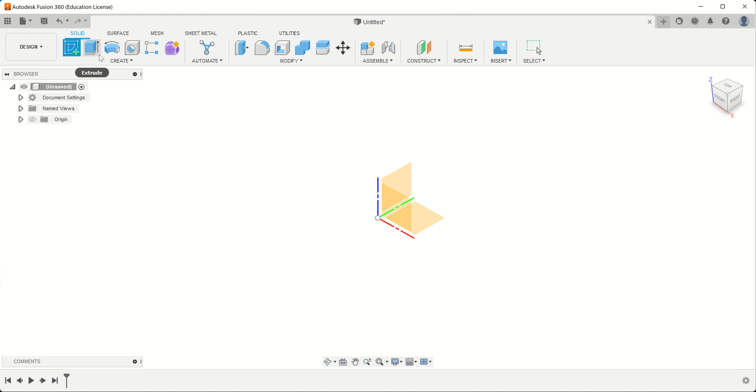Okay, so now we know about the center point, the axis of the work planes. The way that CAD works is that we need to create a sketch and turn that into a feature, in this case extrude. So I'm just going to show you roughly how it works, and you can have a little play yourself. So again, we need to create a new sketch, which you've seen before, and then the system is asking us to pick one of these work planes.

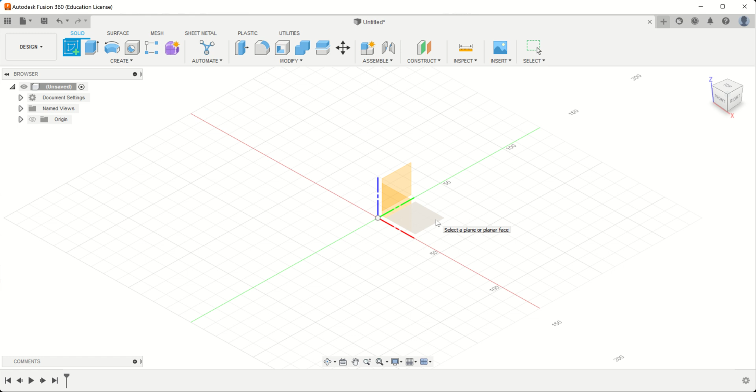So as we move around, we can go and select one of the three work planes. So we can create a sketch on a work plane or a face, as you can see there in the tooltip. So typically we always sort of look from the top down and create a new sketch on the XY plane, which is this one here. Once you click, your screen goes into a 2D mode.

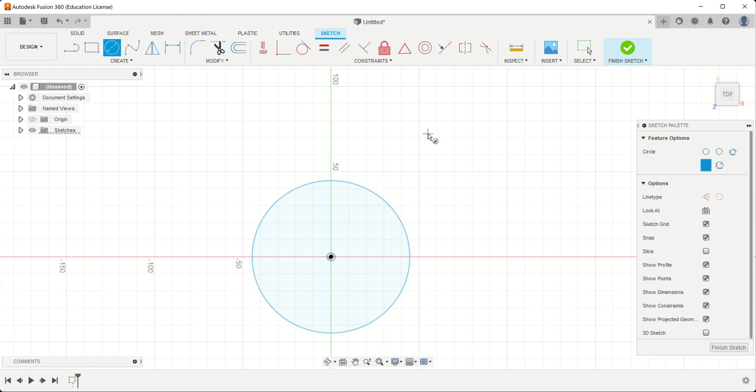We get the sketch palette up, okay, and then we can draw some basic shapes, and we'll go into this in more detail shortly. First of all, I'm just going to create a shape, so I'm going to draw it from the center point. I'm going to draw a circle. For this point, I'm not really worried about how big it is. So I've got what we call a closed profile, so a circle, so each end of the circle is attached, and you can tell it's a closed profile because Fusion has shaded it in.

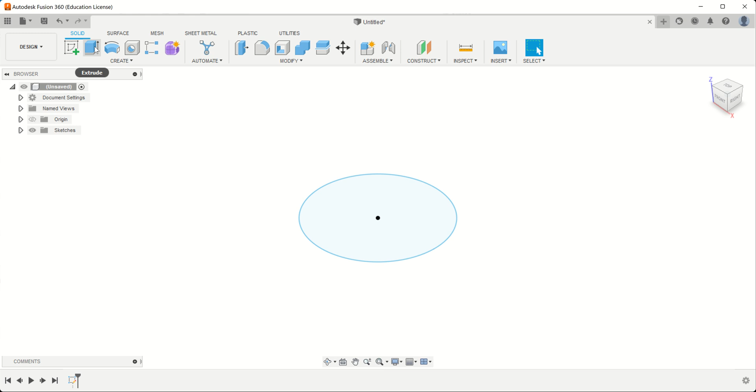So I'm now going to click Finish Sketch, which is on the right hand end, and it goes back to 3D mode. So now here we've created a sketch. You can see this in the timeline down the bottom. There's our sketch. So we're now going to turn this sketch into a feature, and the most common one that we use is the extrude. So we can click extrude. If Fusion sees a single closed profile, like it can here, it's already selected it. If it could see two or more, you have to select which profiles you want to extrude.

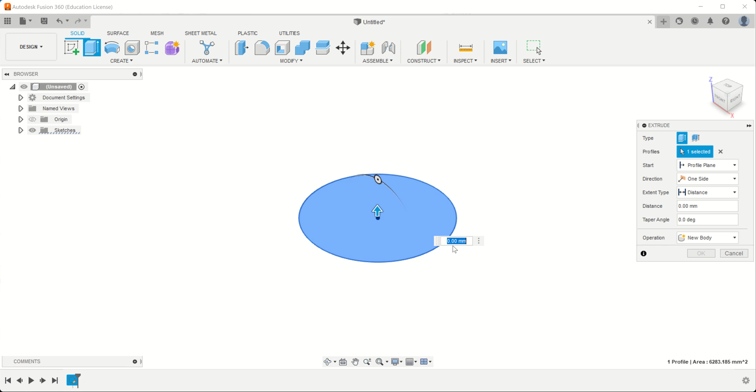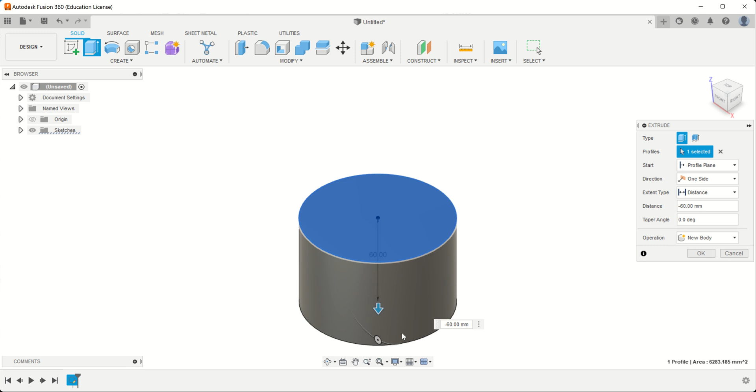Okay, so by default it's going to extrude it 0 millimeters. Okay, so we can drag it, we can type in this box here, we can type in this box here, it doesn't matter, they all do the same thing. Okay, so we've got some choices now. We can either go one side, in this case it's going up, but we can also take that down if we wanted to. Okay, and it just says a minus number. It just means it's going below the work plane, so we can go up or down.

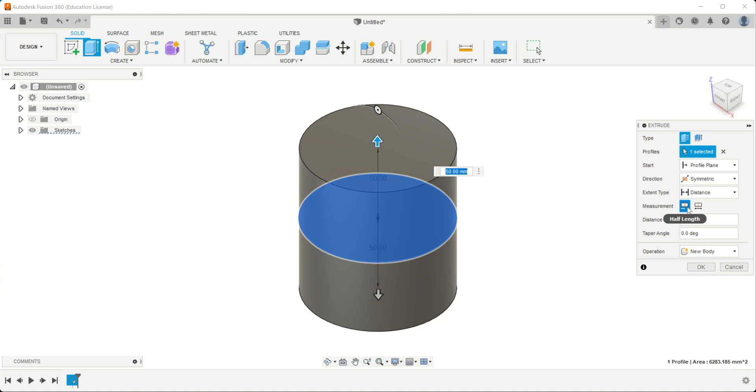The other choice we've got is two sides, so we can go 10 mil down and 50 mil up if we wanted to. And then the other choice we have is symmetrical, so in this instance it's doing 50 mil both sides of the work plane. That's what this one is here, and then this one it's doing 50 mil in total from top to bottom. So there's just some choices that we've got going on here.

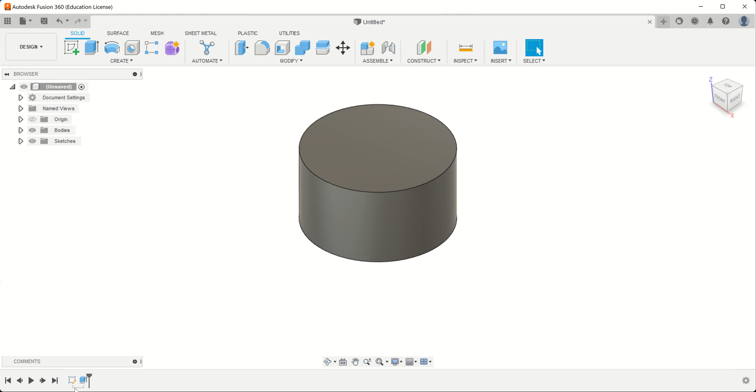So I'm just going to put it back to one side and go up, and hit OK. We now have a feature that's based on this sketch, and you can see here that the little U-shaped marker underneath shows that they're linked.